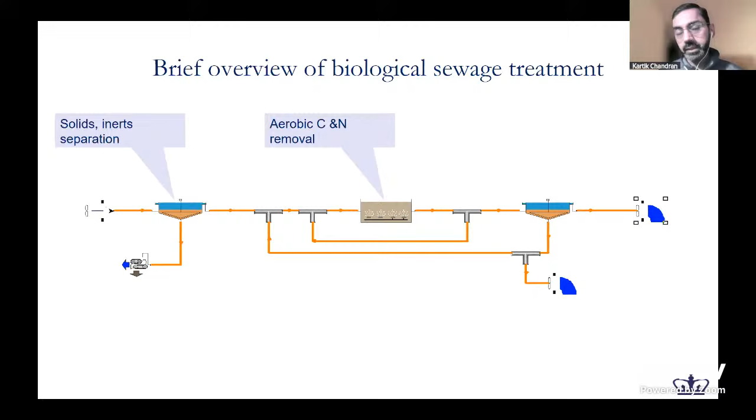But if we just peel open some of this, essentially what we are doing in these centralized treatment plants is providing air, providing oxygen, which is in air, to convert the organic carbon to carbon dioxide. And if there are regulations, if there are limits, then the nitrogen and phosphorus also get transformed. Otherwise, they just get passed on to the environment.

And then finally, what we do is we settle the bacteria that we have. So what we have done in this schematic is that we have produced more organisms. The bacteria that consume the carbon, nitrogen, phosphorus, they have also replicated. And so we don't want to discharge those bacteria. Essentially we settle the bacteria and we send them back. And then the treated wastewater gets discharged into the environment.

To give you numbers, in the US, only about 5 to 7% of the water that is used is actually from a circular water model. Otherwise, it's all a linear model. And a model like this also is part of that linear model, where we treat wastewater, but then we discharge the treated wastewater into the environment.

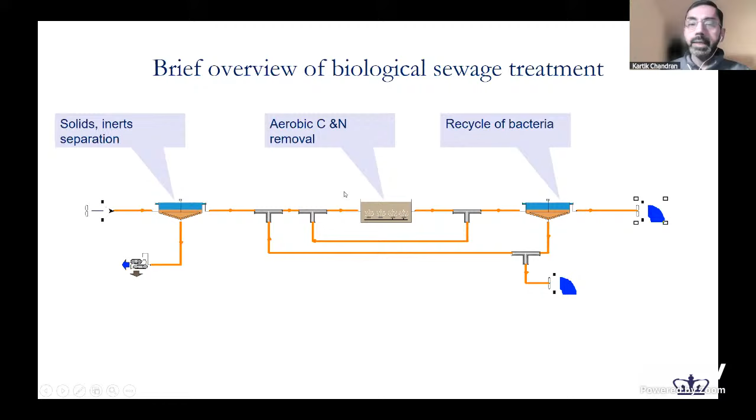Now, let's take a look at the footprint of just this process. All of this is not free, obviously. The bulk of the energy that is consumed in a wastewater treatment plant altogether comes from this one particular process, and within that, from one particular act of providing aeration. This is what essentially precludes the vast majority of the world today from accessing a model like this.

There are other implications as well. When things do not go as planned or as designed, these reactors also produce other gases, including greenhouse gases, such as nitrous oxide, which is a substantial challenge. To give you numbers, if we take the worst performing plants in the US in terms of nitrous oxide greenhouse gas production, they may be treating the wastewater to a certain degree, but if we apply those numbers across the US, that nitrous oxide footprint is equivalent to roughly 100 million cars in the US per year. The population of the US, for reference, is about 330 million. So we're talking about a substantial contribution of this model of wastewater treatment—not just to clean water, but to energy input and greenhouse gas emissions.

This is not free by any means. But it's important to keep in mind, to move forward positively, who are the organisms doing all of this? It's the microorganisms, the microbiomes. So therein lies the opportunity for us to do something different, something better.

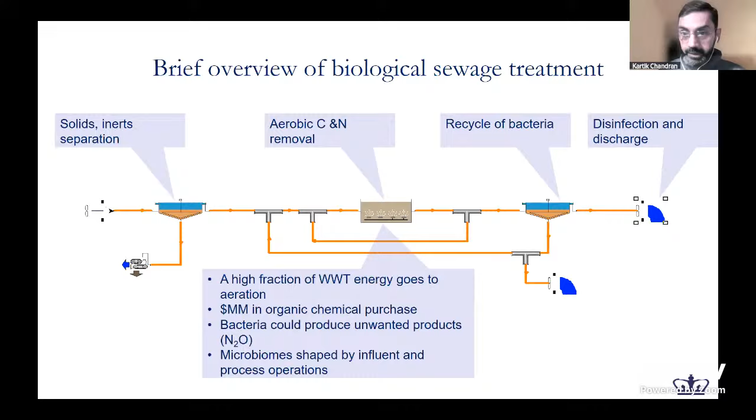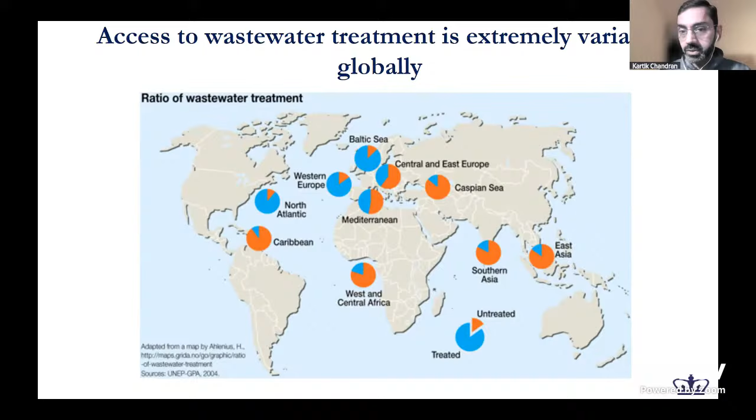And when we talk about remote, this is why I wanted to put that term remote in perspective. This is in the city of Accra, which is the capital of Ghana, so it's not remote by any definition. On the other hand, when we talk about access of a technology to the stream it is supposed to be treating, it is remote because there is no connectivity.

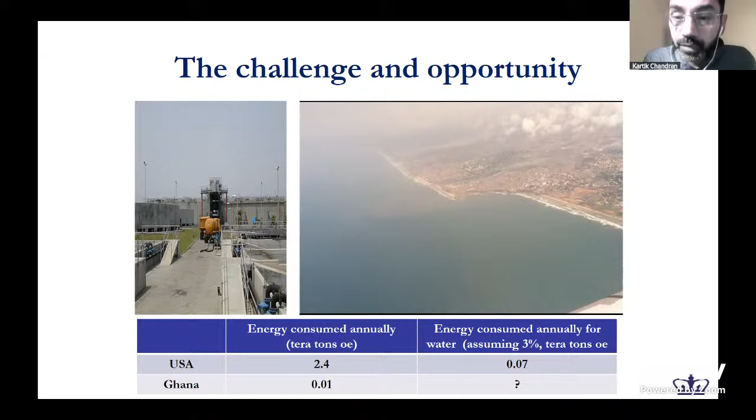So let's go back to this model and try to frame the problem here. Instead of taking this model and putting in even more resources to treat wastewater only for it to be discharged, or worse, as we saw in the last slide, just dumped into the environment without any treatment because of the lack of energy, is there anything else we can actually do? Is there a different way of looking at this to prevent such occurrences? The answer is yes. If we take a look at what is coming in, in terms of carbon, nitrogen, phosphorus, the chemical states in which they come in, the answer is a big yes, a strong yes.

Essentially what we can do is that from these different waste streams, we can start to think about producing energy, not just biogas, but higher endpoints of energy. I'm very happy to be presenting this to an audience in Brazil, which has always been a leader in terms of ethanol manufacturing, advanced fuels, next generation fuels, and those fuels do not have to come from the agricultural side. The feedstock doesn't have to be agricultural waste. It can be domestic waste, it can be municipal waste. Carbon is carbon, nitrogen is nitrogen. So we can think about producing different forms of energy, not just biogas, bio oil, and so on.

And we can also think about the manufacture of chemicals as well, because wastewater treatment, sanitation, also consumes a lot of chemicals. And these chemicals can be produced from within, based on the streams that come in.

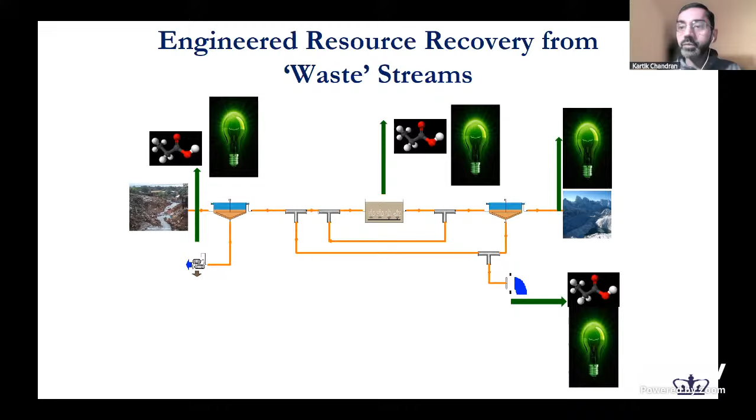We use water for so many objectives. The potable fraction is very, very small, and that we can continue to get from our conventional sources. The water for other objectives—for instance, we don't have to flush our toilets with drinking water, which is what we are doing—is what a model like this can offset.

Okay, I'll skip through this in the interest of time. So let's look at the economics. If the economics are not there, nothing is going to make sense. And so I'll give you some numbers.

The demand for water and sanitation services is projected to be very substantial, and this is probably an underestimate as well. In countries like India, the lack of water and sanitation, which is quite poor even now, costs the national economy quite a bit—again, I have a feeling this is an underestimate. But the point is, technologically, this is what the overall sector has been trying to overcome. We need some more enabling factors, as I will present as well.

So the business case is there. So then, what do we do? And then finally, I want to present one direction for us to kind of mull over as well.

So there's this whole direction of how do we achieve adequate wastewater treatment for reuse and sanitation. Should we try to build bigger and bigger sewered centralized treatment systems, or should we go to the other end of the scale—smaller systems which are better connected, localized, on-site—which then overcome this challenge of transportation of waste?

There is no one answer to this, and so I think it would be inappropriate for us to say that only the centralized model works or only the decentralized model works. But if we are truly aiming to have an impact on communities that are not connected today, perhaps we should keep our perspectives open to be able to go to smaller and smaller scales and have impact.

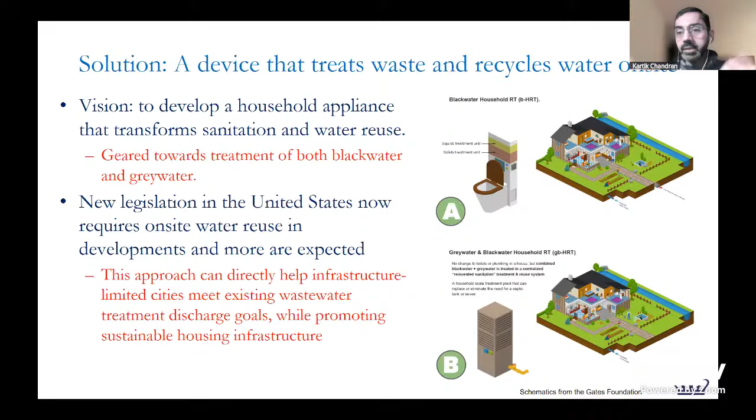I will just present two brief schematics here. One which only treats the streams that the human body produces, which we refer to as black water, and then a combination of gray water, which is water we use for other purposes like cooking and washing, and the combined stream. So the systems we are looking at could be directed only towards one of these streams or a combination of them. But this is all happening within the boundary of a community.

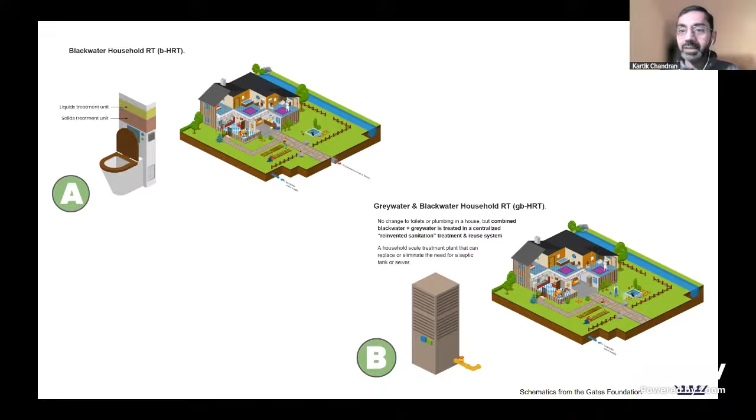These communities can be completely off-grid, or they can be part of a city where there is not enough access - there are existing cities like this. One of the biggest slums in the world is in the city of Mumbai, called Dharavi, and systems like this could be very well envisioned and implemented there. Ironically, in these slums there are very mature and active models of resource circularity - not for water, but for electronic waste and other materials. It's a $1 billion industry. Why can't we include models for water and sanitation that are circular in these communities as well?

Let me now take you back to Ghana, where this was one of my first projects. I designed and implemented a system that treated fecal sludge from the equivalent of 20,000 individuals. You can see some of these covers, and these tanks here. Essentially, for 20,000 people, the overall reactor volume for treatment was only about 120 cubic meters, which is a tiny fraction of what the volume would be if we designed a centralized treatment plant.

This treatment plant was not connected by a piped network. In fact, it was sitting at a dump site where trucks were coming in, but instead of the trucks just dumping on site, we were putting that fecal sludge into this system.

In terms of circularity, the initial idea was to convert the fecal sludge into a fuel - not to compete with the fuel industry, but to have fuel that we could run the plant on. So the idea was that it would be a completely self-sustaining treatment plant. That was the initial hypothesis. We designed and ran this plant for more than 1.5 years. But ultimately, we were not able to achieve full circularity - that wasn't possible because of the efficiency of the system. It was still an offset.

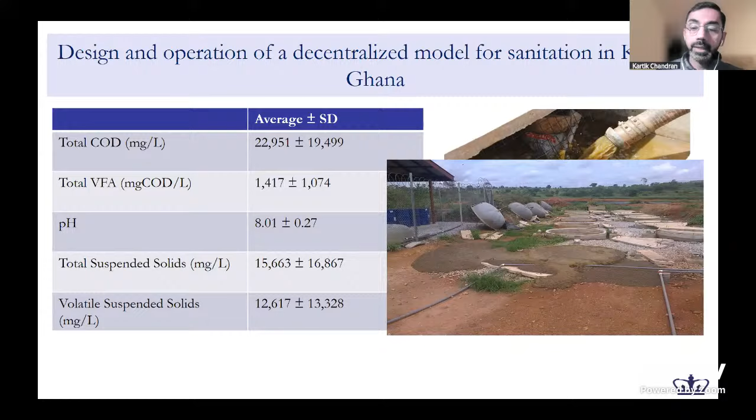So this is, again, not hypothetical - all of this can be done. The way we actually did it involved quite a bit of engineering that went into something like this.

We even developed a mathematical model, a digital process model, to describe this decentralized sanitation process. This table shows the distinctions — I'll go through it quickly. The point is that there are distinctions between these treatment processes.

These are the parameters associated with the treatment process I'm showing here. The point is that these treatment processes are quite different in terms of what is happening inside, compared to a regular wastewater treatment process, because the streams are different.

One note of caution here: it is very good that we are trying to intensify these systems, aiming for recovery of resources, circularity, and so on. But the important thing is that from a technical and technological perspective, we can't just take designs and parameters typically associated with wastewater treatment and use them for something more innovative like this. So there is room for innovation and discovery in research to answer questions relating to these distinctions — these are new, different technologies, and so there is novelty here as well.

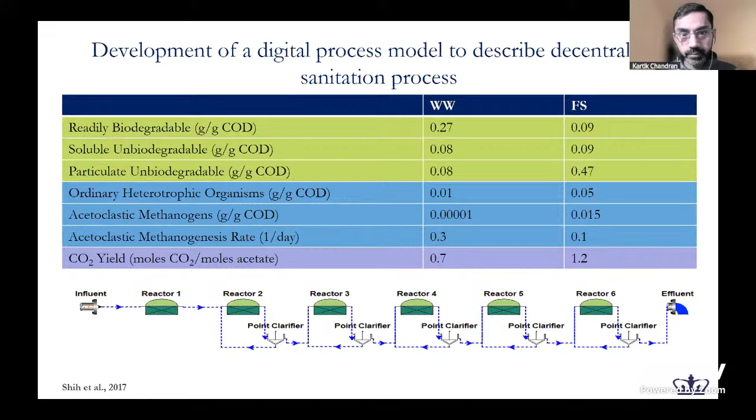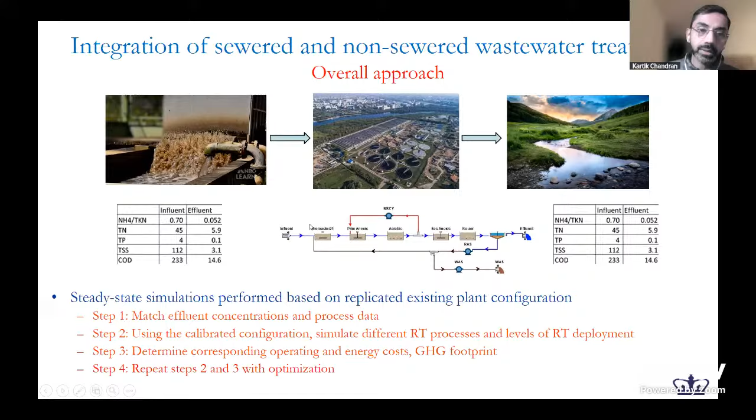Now let me go back to the concept of decentralized, centralized, and hybrid models. We are working with different cities around the world, trying to determine the fraction of wastewater these cities produce that should be treated in a centralized model versus a decentralized model in different locations. We are testing different types of decentralized treatment systems — these are just a few examples, and we are testing more.

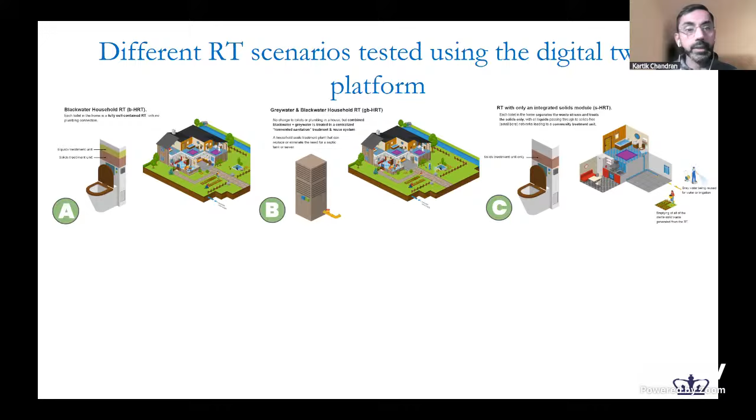This is where concepts like urine diversion, treatment of gray and black water, and other options come into place. These are the different decentralized systems we are testing for combination with different centralized wastewater treatment systems. We are quantitatively trying to understand the implications in terms of savings in operating costs, greenhouse gas production, and performance.

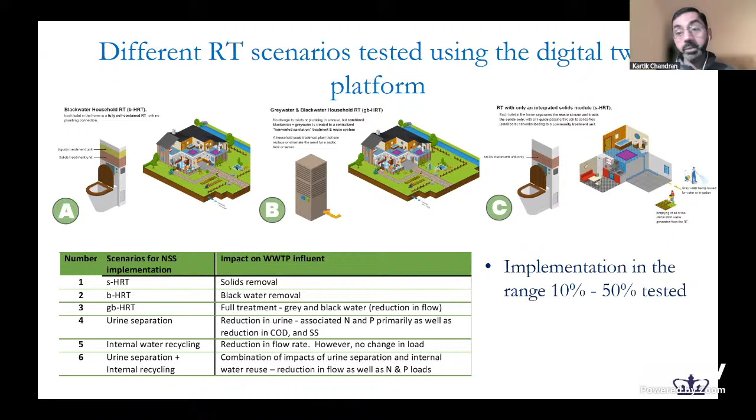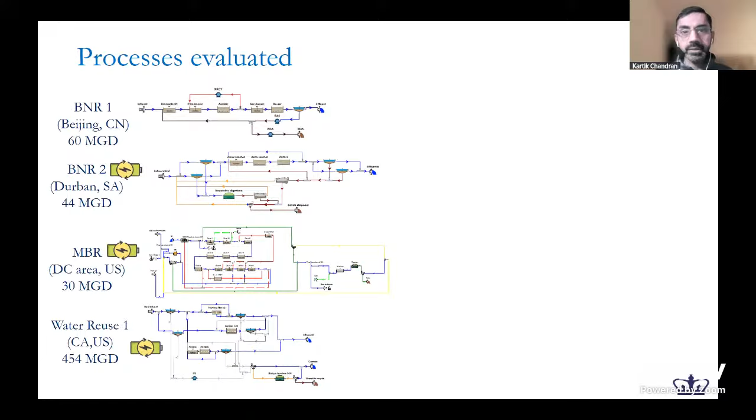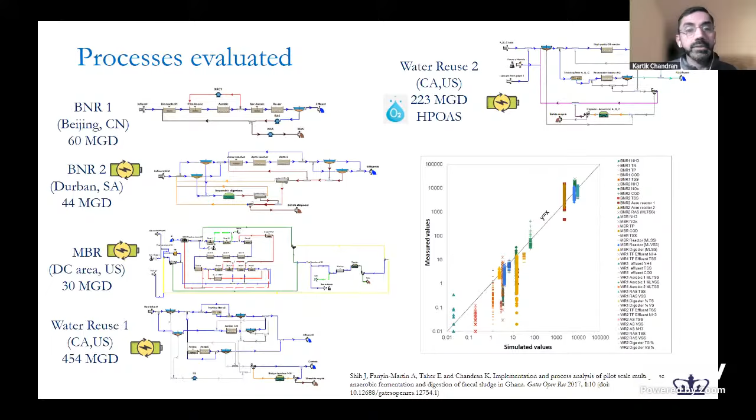But this is what we are doing now — this is very quantitative, and we would love to see if there are possibilities to work with communities in Brazil, perhaps even in Portugal, to understand how existing treatment could be complemented and supplemented with decentralized treatment as communities expand.

Let me quickly take you through the benefits. To be efficient with time, what I'm plotting on the y-axis is the savings in energy per unit of waste treated in the decentralized system. Picture a centralized plant connected to decentralized systems upstream: if we have 1 liter of wastewater taken out by the decentralized fashion, there are 99 liters coming into the centralized treatment plant. So if we have a 1% savings in energy for a 1% offset in flow, the height here will be 100 — a 1-to-1 benefit. If we take out 1 unit of wastewater, we save 1 unit of energy.

On the x-axis, I show the different cities for which we have done this analysis, and the different colors represent the different decentralized technologies used. What happens again and again across the board, except for this last one, is that the orange bar and the gray bar — representing just black water treatment and gray plus black water treatment — are consistently superior to technologies that just take out solids, just take out urine, or just recirculate.

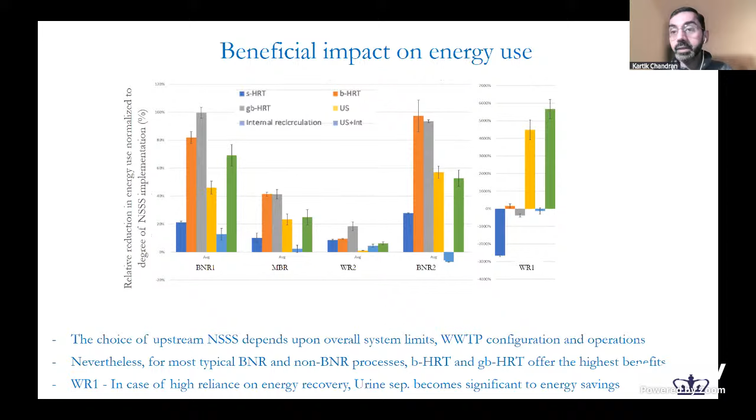The bottom line is that these technologies allow us to perform at a much higher efficiency than we otherwise would. With optimizing the process - again, this is the reference line of 100%, so if we take out one unit of wastewater, we save one unit of energy - with optimization we're able to operate at a much higher efficiency compared to that 100%. When we connect the system, it's a different system, so we have other degrees of freedom to optimize, and with optimization we achieve much higher benefits.

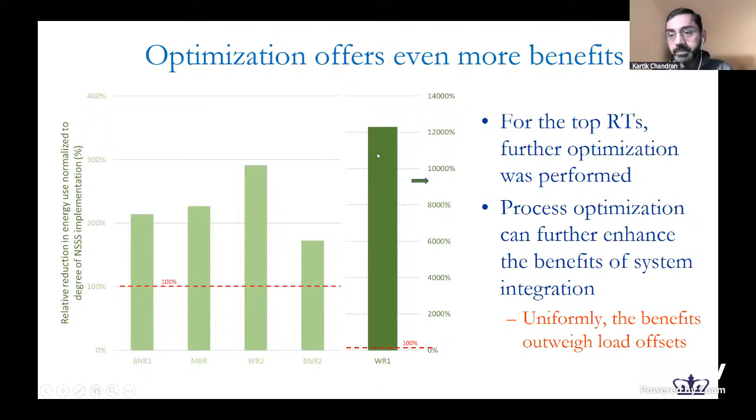Okay, what else do we need? What are the other innovations we need? I've been talking about decentralization, centralization, different technologies. At the end of the day, the bulk of the treatment is still biological, and there are interesting innovations we need to focus on. This is some of our work where we use fungal processes, not bacterial, but fungal processes to treat not just conventional pollutants in wastewater, but also some of these emerging contaminants.

And some of these streams don't have to be liquid - they can be the liquid squeezed out of the solids stream as well. So then we're talking about compounds like PFAS and others. We do need interventions, and this is one exciting direction within the category of enhanced biocatalysis - different catalysts, not just bacteria, but bringing in fungi. This project involves both fungal and Fenton oxidation - fungal oxidation and chemical oxidation.

What else can we do instead of producing biogas? Going back to our project in Ghana, where we converted the fecal sludge into volatile fatty acids, and then converted those volatile fatty acids into biodiesel. Let me go to the next slide.

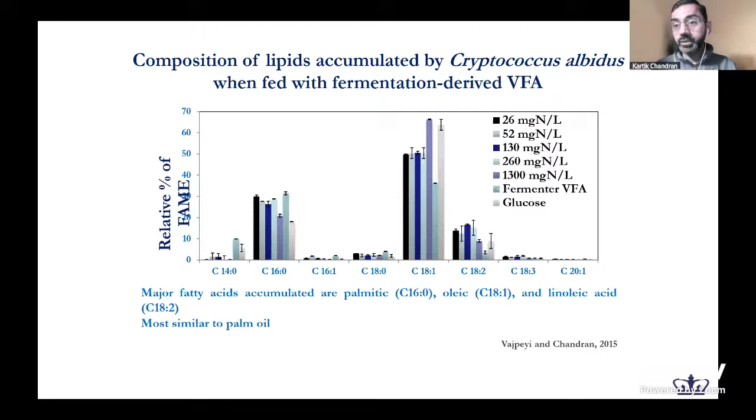In terms of what we actually produced, the point of this graph is to show that for different conditions, using a different biocatalyst - not bacteria, this is yeast - we were able to convert the fecal sludge organics into lipids, into fat that looks like this. This fat profile is essentially identical to that of commercial oil, palm oil for instance. So we're not producing palm oil by cutting down palm trees, but producing it from fecal sludge.

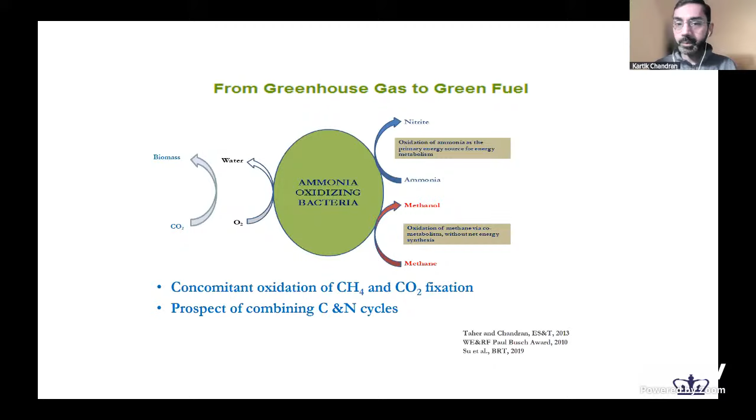There are other ways to convert and other end products to focus on as well. But the point is not to produce chemicals and fuels and other materials, which we have done and others have done as well - we can even go to hydrogen, bioplastics and biomaterials. The point is not to compete with these industries; the point is to go from zero sanitation to one sanitation, using these as enabling factors.

Finally, we need some kind of structure when looking at improved access and decentralized treatment. One of the biggest accomplishments in this sector, very recent, starting in 2018 when the first version of the standard came out, is the development of the ISO 30500 standard for what we're now calling water efficient sanitation systems. This was one of the biggest developments. It's available on the ISO website, and this standard allows for consistency in the development of these decentralized, non-sewered, water-efficient sanitation systems. Currently there are efforts underway.

Any time that there is a new technology that is developed, those technology developers need to make sure that their technology is meeting these standards. So again, it gives us some structure and something systematic that we can work with.

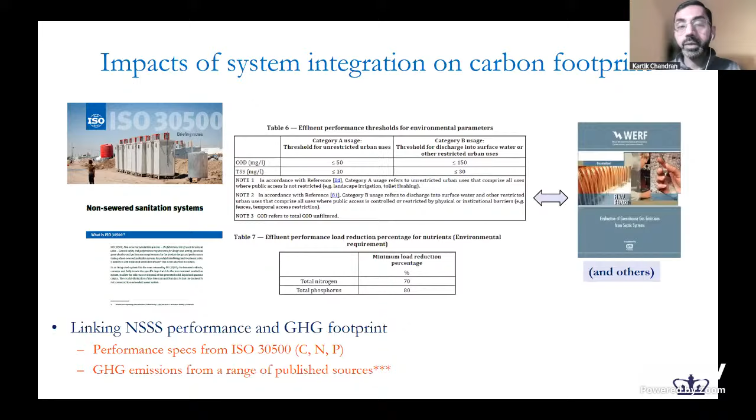I'm going to skip through the greenhouse gas section in the interest of time. And so just to wrap things up, what I would like to say is, I think this, as Professor Jessner mentioned, this is just the beginning. There are so many opportunities in terms of looking at the different scales at which centralization and decentralization can work. There are very exciting innovations in terms of directions such as biocatalysis, reactor engineering, and new frameworks such as the standards that have come up give us something more quantitative and systematic to work with.

Thank you very much. Thank you very much, Professor Kartik. This is a tremendous presentation. I could see Anna's face admiring the very good ideas. It couldn't be more useful for Brazil at this point, and I'm sure in many other countries.

And let me say, and I'm sure that Adriano and Sergio will agree with me and Alexandre Situaras, we would love to give this space to have a continuous dialogue with the Institute, with Anna's Institute, and with the companies in academia, in the government of Brazil, of the state of São Paulo, in order to take advantage of this tremendous research experience and practical experience in different countries and sites.

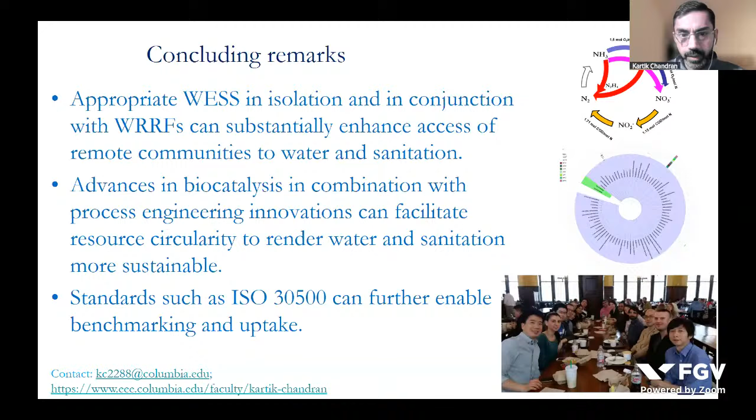Another finding from that report relates exactly to what you're saying. We found that wastewater treatment plants that do a better job removing nitrogen — what Professor Ana Silvia referred to as tertiary treatment — are also the plants that emit less nitrous oxide. So this is a win-win if we design these systems: cleaner water, cleaner air.

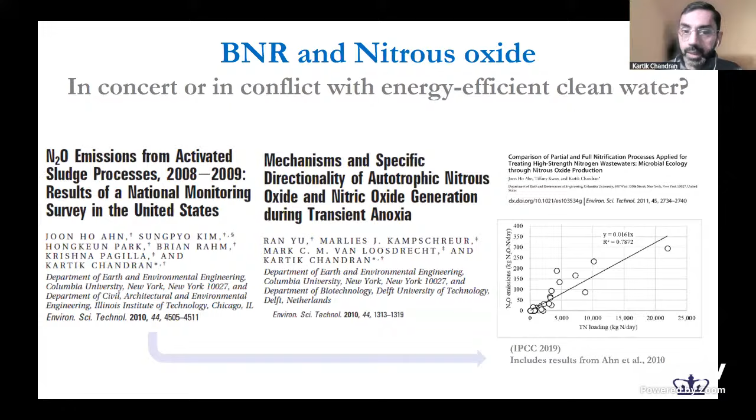But it is also a lose-lose if we do not treat this. No treatment doesn't just mean polluted rivers and polluted water, it also means increased greenhouse gas emissions. Last year, multiple UN agencies came together to promote this concept of decarbonization of sanitation, using carbon credits, looping this back into the sanitation space. So you take the credits, improve the technology, the technologies produce less and less, and the credits go more and more. This is real - quantifying the credits and using them to promote clean water and decarbonization.

Thank you for raising this point. Thank you, Professor. My colleague, Professor Sergio, has some comments. Hello? Okay, thank you, Professor Chandran. Thank you, Nalucia. Very timely, interesting flow of ideas. I'd like to make 2 comments and 1 question, okay?

First, I noticed he used the word 'waste' in quotation marks. I understand this is meaning to say that it's not waste itself, it's just an input to other recycling, reusing process.

The second thing is that the idea of reusing water from wastewater treatment is a very timely idea. I think it's very useful, a huge opportunity in remote areas in Brazil - not only distant areas like the Amazon forest or little communities, but also coastal areas in the developed state of São Paulo. I think there is also an opportunity to use that technology in such communities.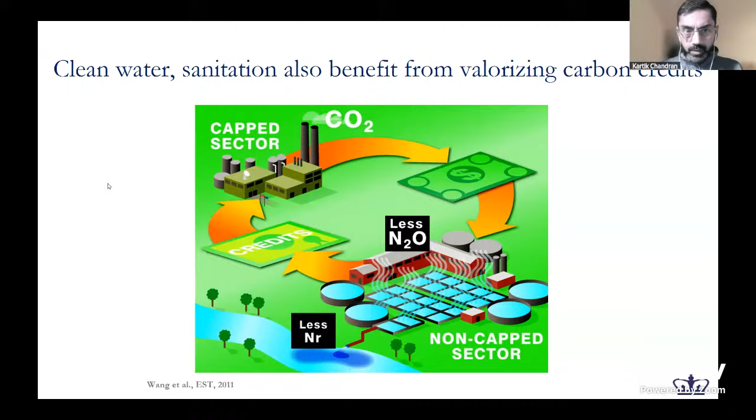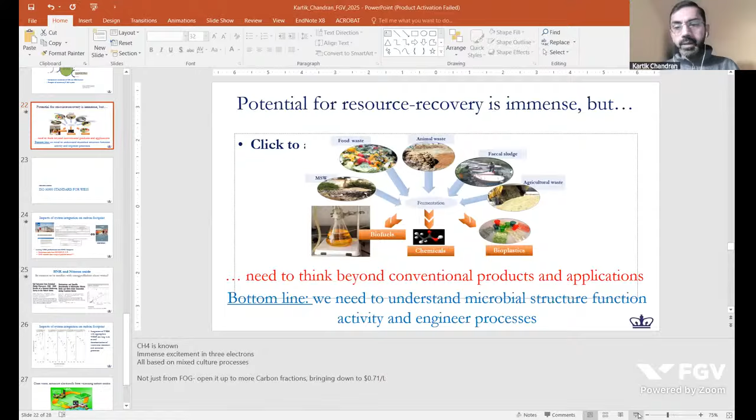So which is where, again, I'm going to rely on one of the slides that I had. Sorry about that. The point is, screen sharing has stopped. Okay, let me just go back to this. Can you see the slide?

Yes, yeah. So the point I wanted to make is essentially this: there are other options available that allow us to intensify the recovery of organic carbon, even at smaller scales. Instead of taking the carbon from where it comes in all the way to methane, if we stop that one last step, we end up with a process called fermentation.

Through anaerobic fermentation, the organic carbon products of fermentation are actually in the liquid phase. So those liquid phases can be concentrated, and there is a possibility of making fermentation-based recovery of carbon feasible, economically feasible, at smaller scales.

Smaller compared to biogas. It's still going to require - we cannot do this for a single household. But there will be a certain scale which needs to be quantified, and then that's the process. We have to look at what kind of endpoints would be of interest.

The beauty of fermentation is that we can even talk about production of chemicals for cleaning, chemicals for use within a certain boundary as well. So I would suggest considering anaerobic fermentation as one of the options for small scale organic carbon recovery, which I think will be more effective than biogas.

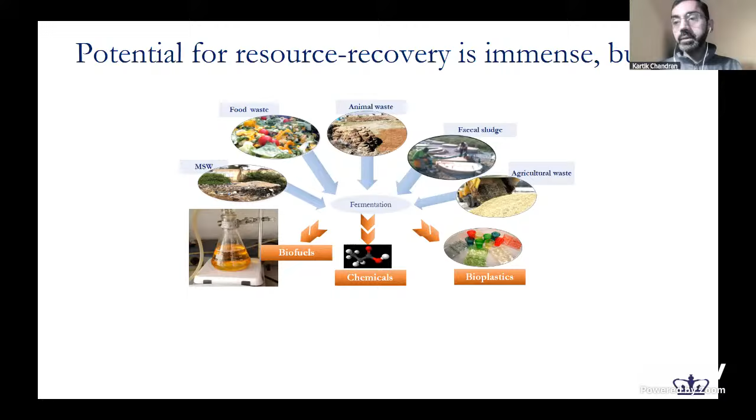Thank you, Professor. Thank you.